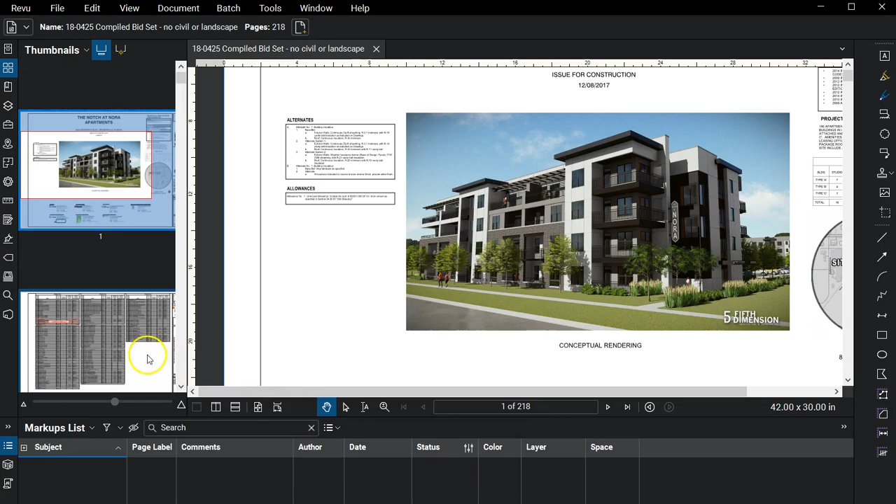It's, as you can see here, 218 sheets in this entire set. A lot of sheets. We can jump here real quick to a sheet index, and you can see all the various different types of sheets that are actually issued in here.

So one of the challenges of managing drawing sets digitally is that you want to make them easily navigable, or easy to navigate, so that you don't have to spend a lot of time finding the drawings digitally, where it's a little more challenging to do that in a digital sense like this if the drawings aren't labeled.

As we can see here, for instance, the drawings just come in labeled by number. So if I scroll through this set, drawing number 18, I don't know exactly what drawing that is, based on what number the sheet was given in the set, because it's likely just the number of the drawing that was slip-sheeted in there in that order.

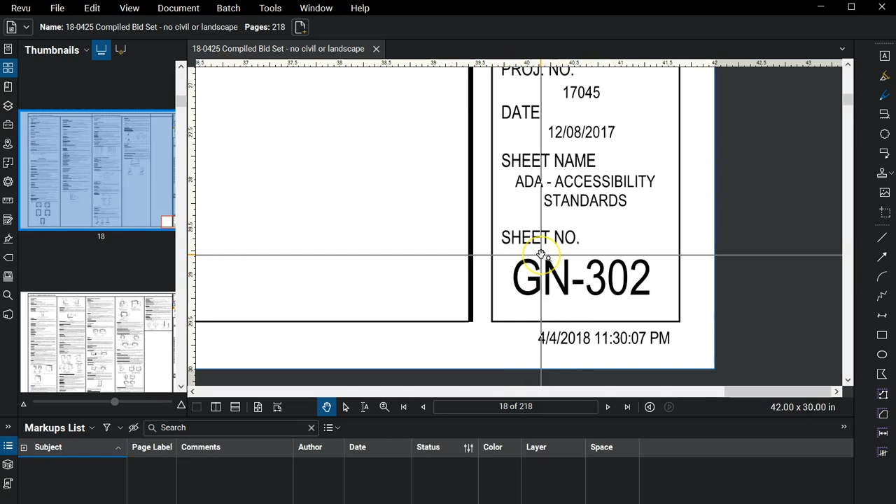We know that this drawing is GN-302. That's the sheet number, but how do we relate that to the sheet? Well, we could go in and just physically rename the sheet GN-302, but if I have to do that 218 times, that might get a little time consuming. So you might check if the architect can make sure that their sheets are labeled properly and accordingly. That can save you some time up front.

But some programs can do auto sheet labels where they can detect what that sheet name is. So for instance here, I can create page labels, and it really is a sense of knowing the program or the type of sheet that you're using, that if your drawings are searchable, as far as the text is searchable, it makes it a little easier to do this process.

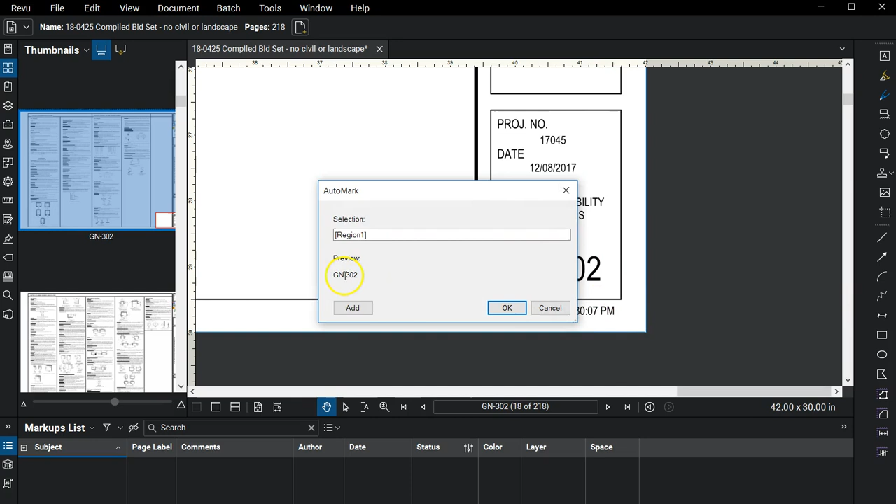So in this case, I can select a page region, and I can tell it to search the sheets in this region, and you can see it automatically picked up GN-302. We can hit OK, and I want to apply this to all pages, just to be sure. Hit OK. And it might take a few minutes to actually run through that for all 218 pages.

The other caveat to this is it's not uncommon for architects to have different title blocks, which is this area off over here, and how they label their sheets and exactly where on the sheet it's labeled. You saw me draw that square around GN-302, but the civil sheets might not be in that exact location. The electrical sheets might not be in that exact location. So this might work for all the architectural sheets, and then you're going to have to go and do this with the structural, the civil, and the others.

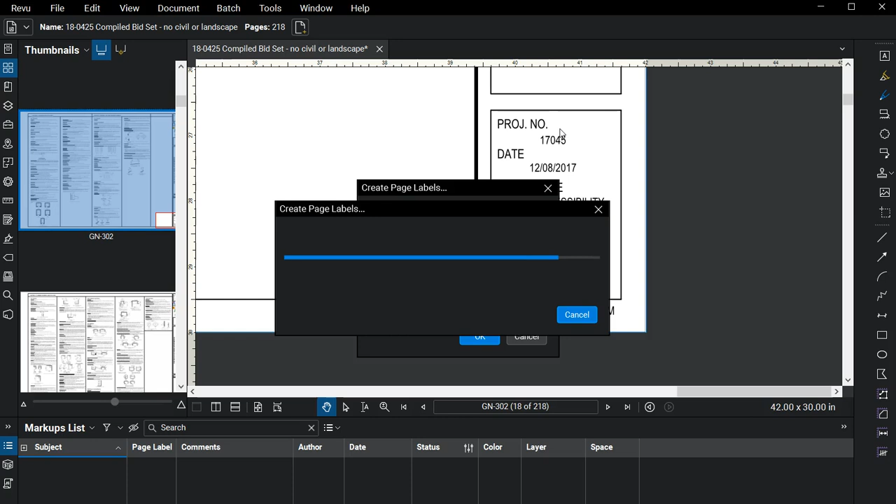If you, though, have an architect that requires all of their consultants to use their title block, the architect's title block, then typically all of the page labels will be labeled pretty much in the same spot. So there's GN-302. So we can look through here and see that indeed we actually have started to pick up the actual page labels themselves, A208.

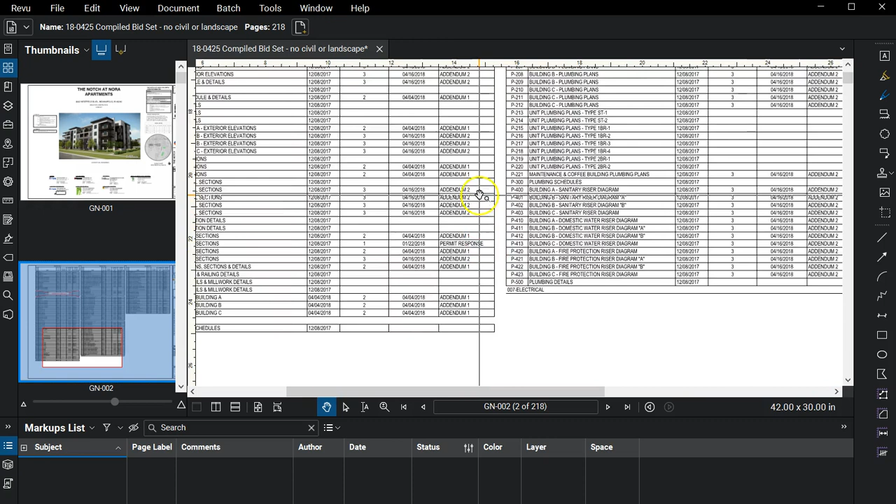This is actually going to come in handy down the road as we start hyperlinking these drawings to make it quite a bit faster than just jumping in the bookmarks or these thumbnails to try and find pages. But if we can go to, say, the sheet index here as the second page, if we can somehow create links where I can come in here and just click on that sheet and it will jump me to that sheet, that would save me a lot of time on navigating the drawings.

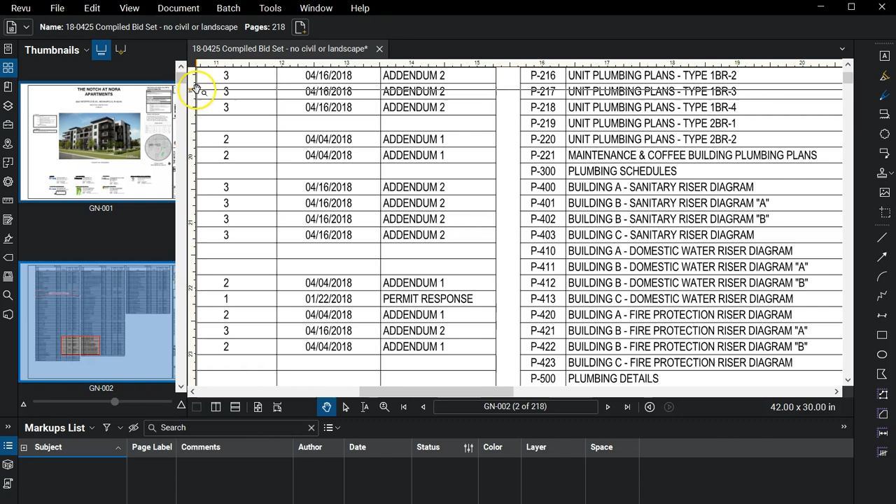And as you'll see in these examples, we're going to cut our time down by a lot. Just by labeling the pages themselves, that's going to cut drastically down on the time it takes to navigate the drawings. So one thing we can do to see how this worked, I can scroll through here and see at what point this might change to something that's not supposed to be, or I could come in here as well. This was the thumbnail view, but in 2018 we have the bookmarks, which I can create based on the page labels that I just created.

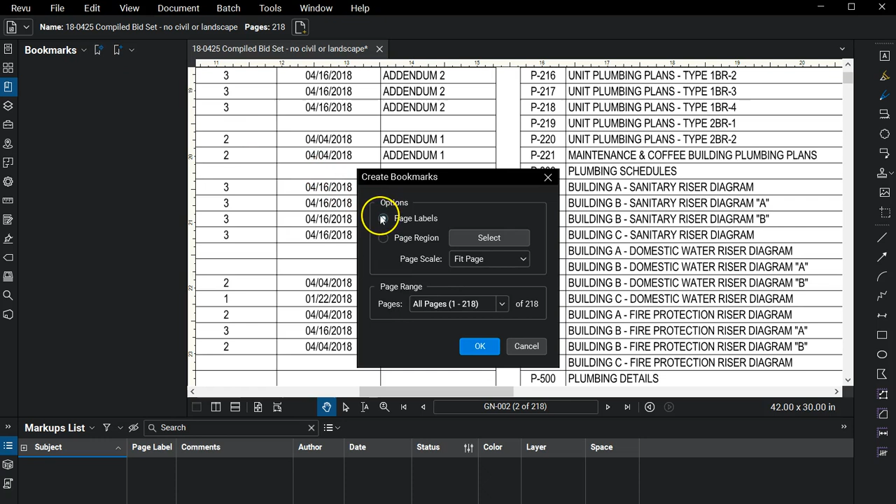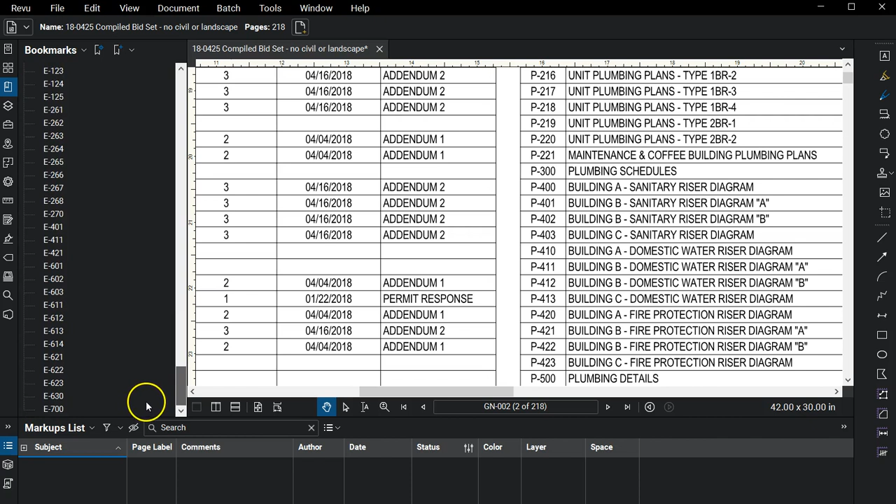So I can actually come in here and create bookmarks from page labels and apply that to all pages, and it should populate all of those sheet names here, as you see that I've done. And I can just scroll through and see where these sheet numbers might start to not follow the same protocol as others, where in this case it appears as though the architect had that title block as a requirement in the same exact location.

But if this started saying weird letters or symbols in here, it might indicate that on the electrical sheets, the title of the sheet might be oriented vertically or something like that. So you just have to be careful. And you can go in and do this as you saw me do for the architectural sheets and find out if it applies to all 218 pages, or maybe for half of those pages you have to go back and choose a new bookmark and only apply it to a certain number of pages that weren't labeled properly. But with our good luck here, we appear to have an architect that has taken the time to require their consultants to utilize their title block.

So every single sheet is labeled in the same exact area. And you can kind of see that by this example that I'm going to show you here, where if I leave this title here, if I click between the sheets, you see how it's relatively staying in that same block area. It shifts slightly depending upon the length of the numbers and the letter sequences you see here, but ultimately it's staying in the same place.

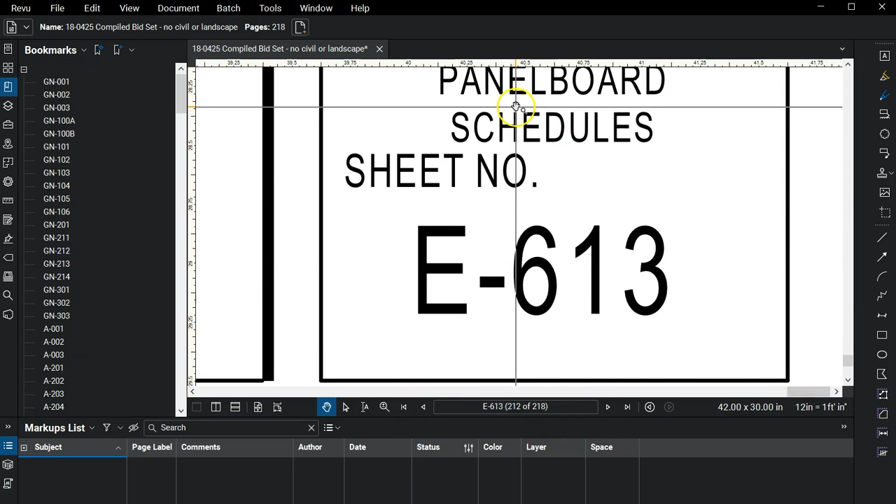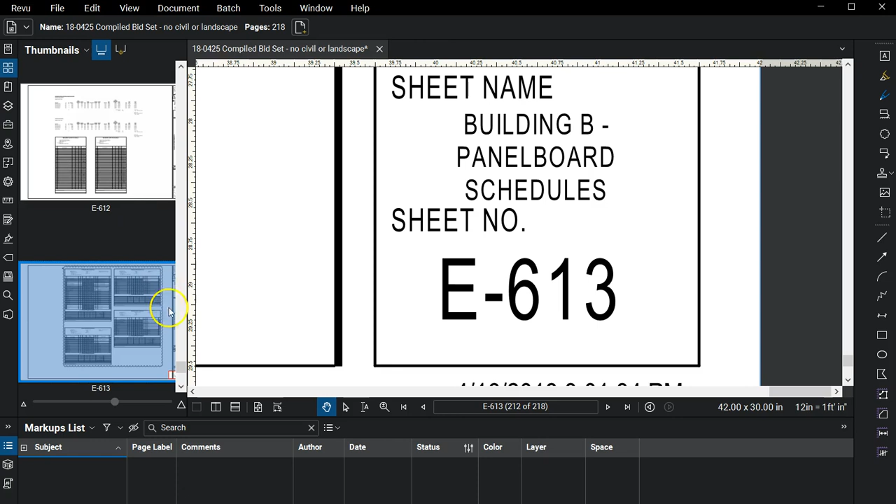You can actually even expand on the sheet number by including the label of the sheet. I used to do that and found it a little cumbersome, where some of the sheet labels got to the point where they were extremely long, so it was kind of difficult to make that accommodation in the page label. But as an example, I'll go back up to the architectural sheets here.

So for instance, this A201 sheet, I could go back to this create page labels, and I could do again page region select. I could tell it, okay, I want it to label this first, A201, and then I want to create an actual label for the sheet, so I'll do a space dash space and add another area where I want it to pull information off. And just under this sheet name here, I'll highlight this area below, so it'll look on every single sheet

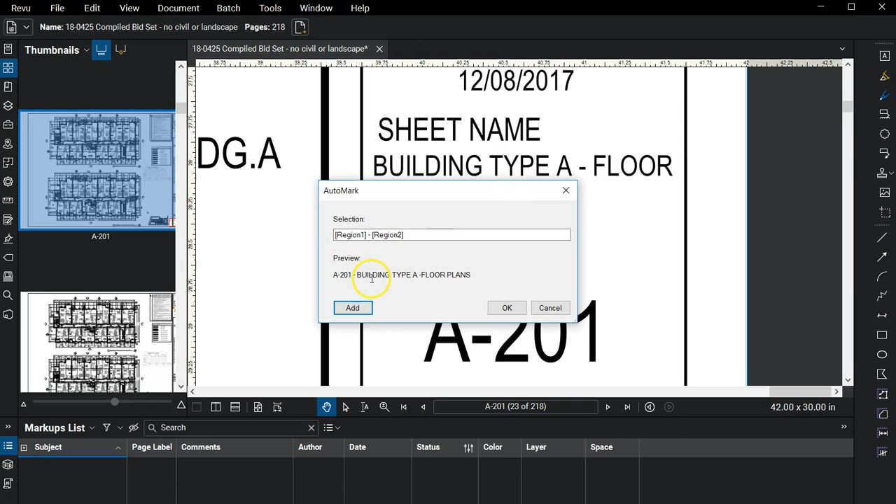for that information. You see here it pulled up building type A floor plans. Well, that's exactly what it says there, building type A floor plans. So it would label each of these sheets with some additional information that's provided here. If you'd like to do that, you're more than welcome to. For my own personal use, I find just the page label itself is useful because I go through the process of providing additional links in there where you don't necessarily need to know what the label beyond the page number is going to be for each sheet. But by all means, if you'd like to do that, you can do that quite easily.

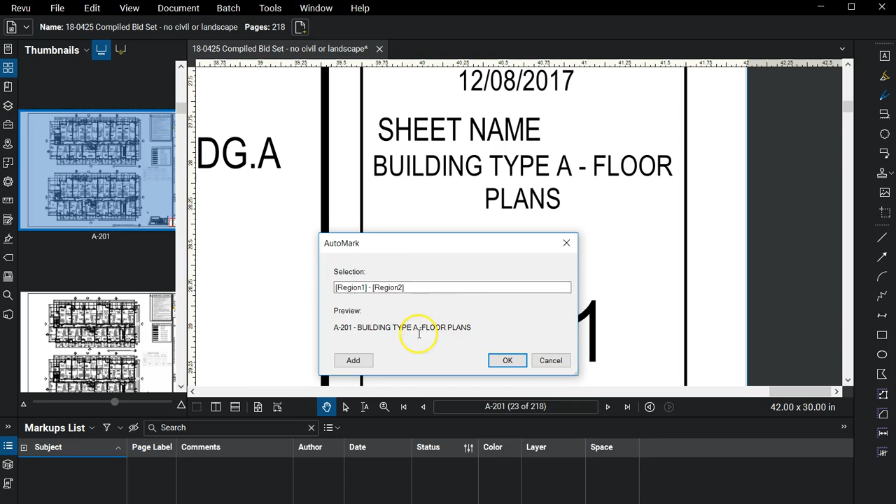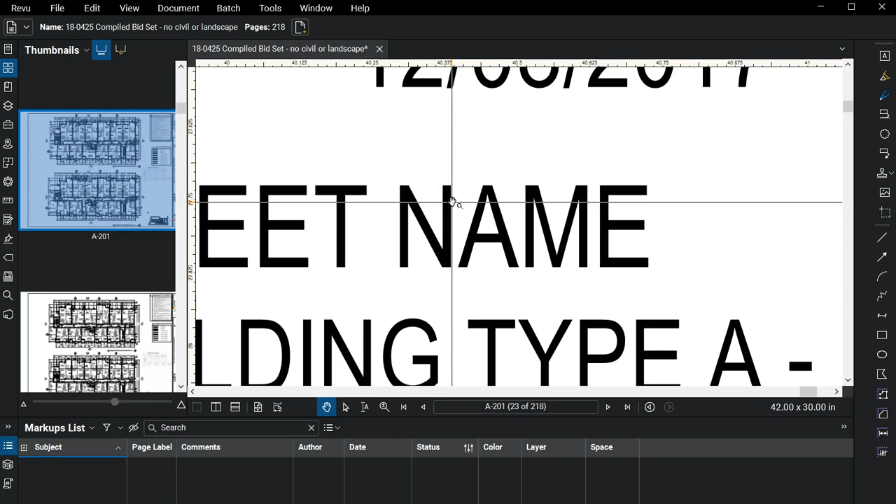You just have to be careful sometimes too, because the program, depending upon how the sheet was exported, might not be able to read some of these words up here. They might be in what we call raster format, where if I keep zooming in, it won't render. You'll see the letters are blocky, but you'll notice this particular sheet happens to be in a vector format, which means that as I zoom in on it, it continuously keeps rendering and makes the letters crisp again. So if you're zooming in on something and like a C, for instance, would look really blocky, that's a good indication that you can't use this feature to have the system automatically figure out what that label is going to be. But having said that, we've already got our pages labeled.

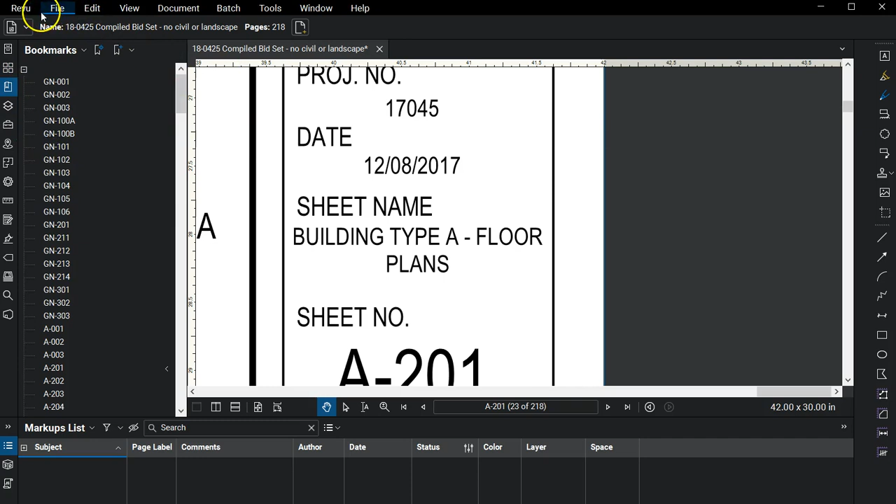It's good habit that once you modify it, you save that, so make sure that you're saving as you go, just so that you don't lose any of that work that you just did there. Even though it really wasn't all that difficult, you can see with a few clicks you were able to go in here and relabel all these pages.

So already what we have is a much easier navigable document, in that now at least I know what these page numbers are. So if I know I'm looking to go to sheet A204, well, there it is. I got the label right there. I can jump real quick to A204. I don't need to know that it was the 26th page in this entire 218 page document. Just being able to click on A204 and it take you to that sheet is a step above what we started with. Okay, but we're going to go way beyond that, and hopefully you can appreciate the direction that we're going to go here as well.

So one thing I actually, as a rule of thumb, do after I get my sheet labels completed, I go through and export each of these sheets as an individual file. One of the reasons I do that is it makes slip sheeting new issuances of sheets later a lot easier to do if I have them as individual files, but it also helps speed up the process of viewing drawings

if I don't have, for instance, a good connection back to a drive folder, or I'm working off of just a bad connection where it might take a while to update a sheet visually and render it in a set of drawings that's 218 sheets large. I mean, that's a fairly large file size. So breaking them up individually can reduce the RAM requirements for the program to actually read each sheet.

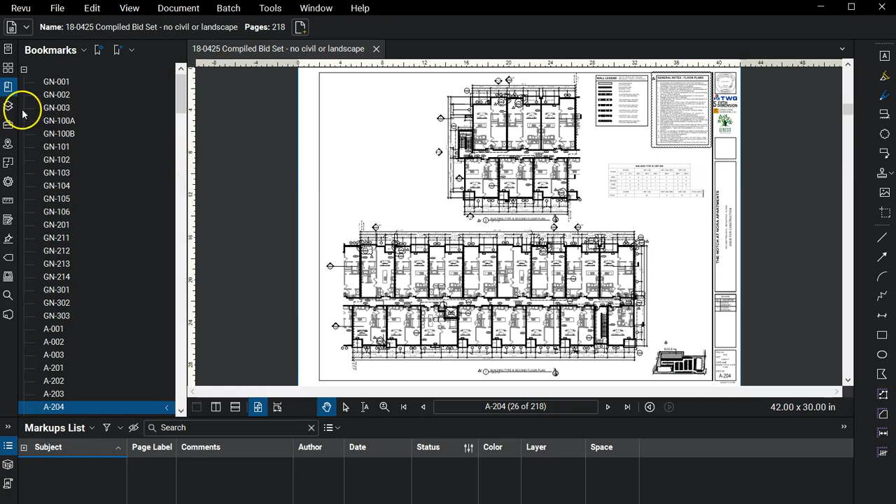So in order to do that, you have to go to the thumbnails view here, and if you just select a drawing and right click, you can see there's an extract pages feature where you can select all pages. What we're going to do is, for one, use the page labels to name the file, so each individual file will be named as the page label. These are options that you can check. For instance, you want to extract each page as a separate file, which we do.

If I don't have that checked, it's not going to allow me to check use page label or overwrite existing files. So if there was already an A203 in there, it would overwrite it. I don't want to open them after extraction because it'll open 218 individual files, and I don't want that just yet. Updating hyperlinks, that's if we have had any hyperlinks in there. I just keep that checked just in case there are. But I want to keep this set as a compiled set until I'm completely done linking it, so I don't want to delete the pages out of that file either.

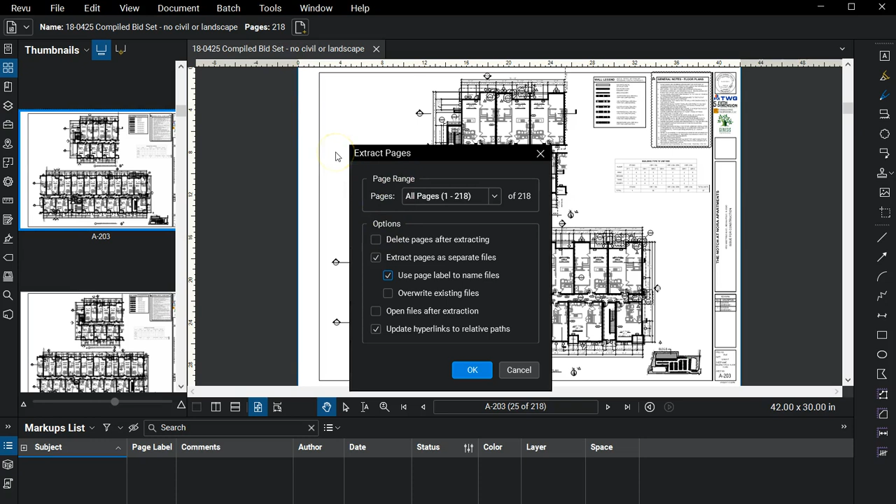Again, just having these options selected is all I'm going to do here, and hit OK, and then it's going to ask me where do you want to save this? So I'm going to just create a folder and call it extracted files. Select that folder, and then it's going to go through the process of exporting each one of those sheets as a separate file. I'm going to pause it here so you don't have to wait for this process. And when you come back, you'll see that each page is actually extracted.

So here, if we go to our extracted files now, you'll see we have 218 individual files, and they're all labeled with that sheet label as we created from Bluebeam. You'll also notice this is a quick way to see what sheet sets you might be missing. In this case, the civil sheets were issued separately, because one thing I don't see in here is a civil set of sheets. So I see A, architectural, E, electrical, GN is just general. It has the wall types, things like that, and your sheet index, the cover. M for mechanical, P for plumbing, S for structural, and that's it.

So I don't have any fire protection drawings, landscape drawings, civil drawings, or any other specialty type consultant drawings in the set. So that might be a first indication that you need to engage somebody for some additional drawings, because frankly there has not been a single project I've ever been associated with that didn't have a set of civil drawings. So just simply sending an email and asking the question, even if the answer is no, well, you've asked the question and verified.

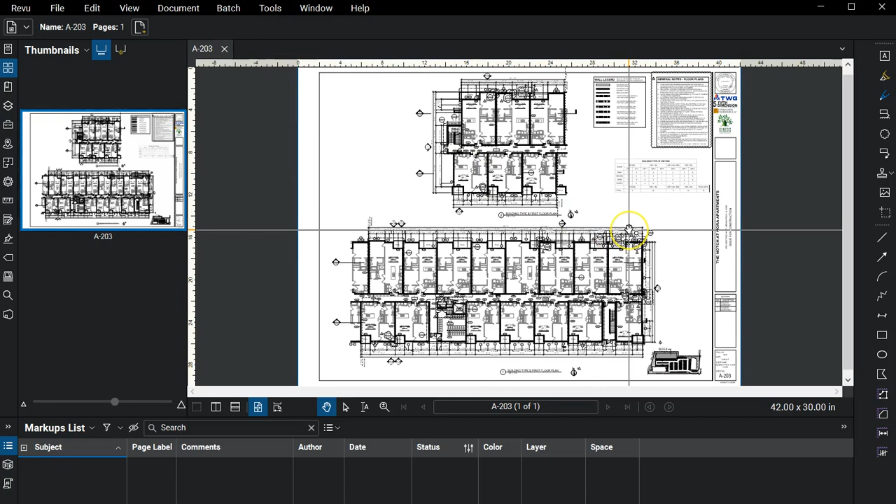But I'm going to go ahead and get rid of this particular set. I don't want that cumbersome set in here. But again, I just want you to see that indeed our sheet sets are now just as single sheets. But even in a single sheet set like this, there's a lot of cumbersome issues we have in here as far as, well, how do I get to A401 if I want to see detail 5 or any of these other details on here, or even being able to jump to different window types.

Without the sheet in a larger conformed set, it might be difficult to do that without having hyperlinks on there. And a hyperlink is just something where I can click on this and it'll take me to at least sheet A-221, which Bluebeam in the 2018 Extreme version actually allows you to do, in a sense, automatically with a few clicks. You can go through the process of doing an initial link where if I click on A-221, it'll take me to that sheet immediately. It won't zoom in on any details, like it won't take me to detail 7 on sheet A221.

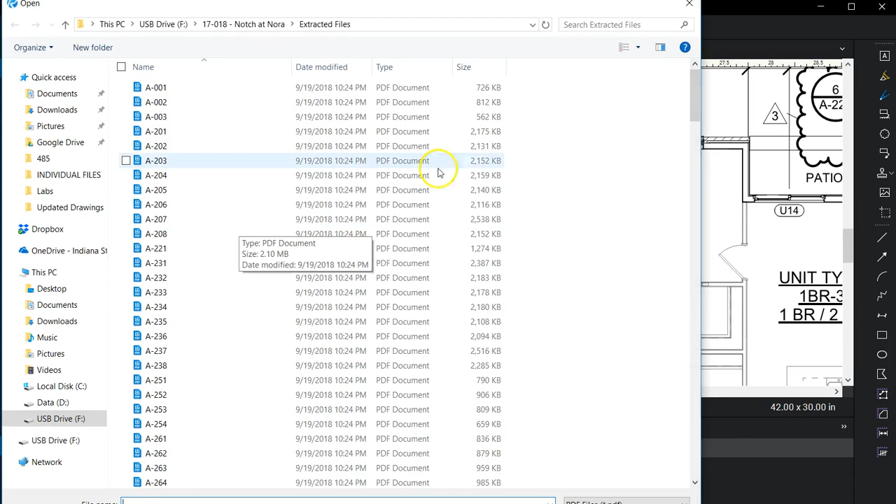But the process, if I didn't have that detail, would be to go to File, Open, and go to that same detail, A221. So I'd go to A221. Here it is, and I had to go zoom in and find detail 7. So there's detail 7. Here I'm at A203. That detail 7, I would have to go actually find that page and zoom in on that detail. But thinking of it from an efficiency perspective, I want to save everybody else working on this project time to not have to go through that process of bringing up each file individually. It's cumbersome. It's annoying, frankly, to have to do that.

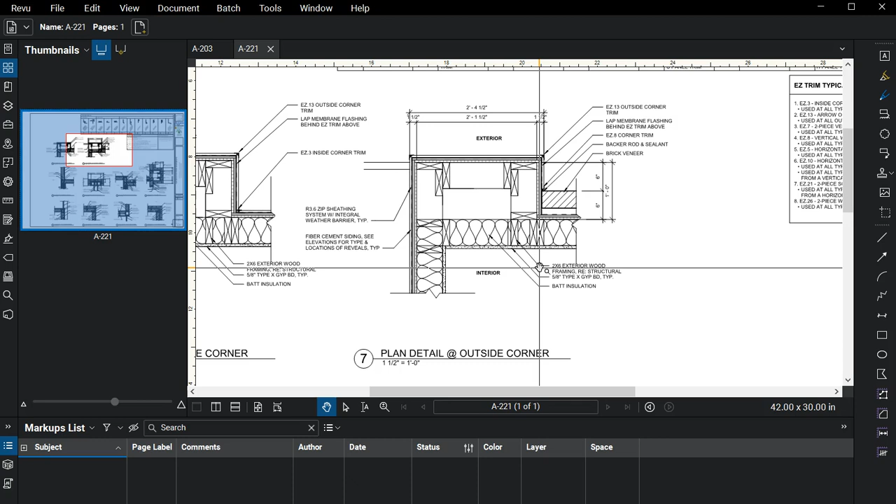But when you think about it, that's kind of what you have to do when you have a hard copy paper plan. You're physically looking at a sheet of paper and you have a half-size set or a full-size set with all the drawings in there. You look at this detail, then you have to go flip the drawing to sheet A221. So in a way, it's similar to, if this wasn't linked, going out and finding sheet A221, just as I did, it took a few seconds. It wasn't a drastically long period of time, but multiply those few seconds. If it took me 10 seconds to find that detail, how often do I do that every day? And on top of that, how often does everybody else on my project team have to do that all day long, every day through the duration of the project?

So again, thinking of it from an efficiency standpoint, what if I could make it easier and faster for somebody to navigate? It saves everybody time on the job site, and then that's multiplied if the company that you're working for shares this exact linked file with the subcontractors, which is not uncommon these days, that subcontractors are given access to this linked file, and they also are more efficiently able to navigate these drawings.

Okay, and keep in mind too, we're just talking about the initial navigation of the drawings, not even talking about yet adding anything like RFIs or even submittals on there, or even doing some markups for keeping as-builts up to date. Say the superintendent on the site might have a set specifically for as-builts, and that superintendent can mark up anything on those drawings, and that's going to be kind of the record set. So if a pipe didn't get installed exactly where it was located because there was some obstruction in the way, they can make notations directly on the set and say pipe moved 10 feet to the south, and actually draw on a line representing the new location of the pipe. But enough on that.

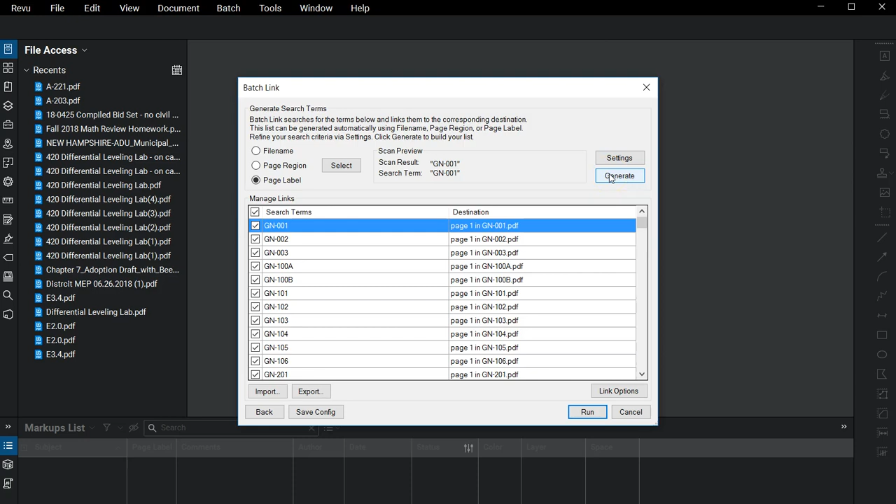But once you have these settings the way you want them, then you hit this generate button, and it's going through the entire set of drawings, finding every instance of this, every instance that there is possible out there.

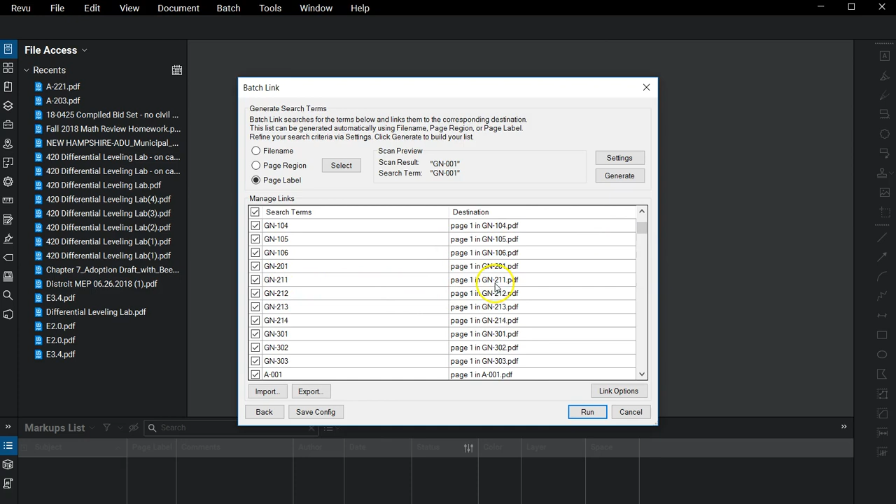So here you see the search term, and you see the destination is the actual file name. So it's going to look on every single individual sheet, and when it finds GN211, it's going to hyperlink to sheet GN211. So I can hit run, and this is going to take a little bit of time for it to run through all these drawings.

So I'll pause the video, and when we come back, I'll show you what the outcomes of this process are. And you'll see how much easier right away it is to actually navigate these drawings with relatively little effort that we've done to the drawings themselves.

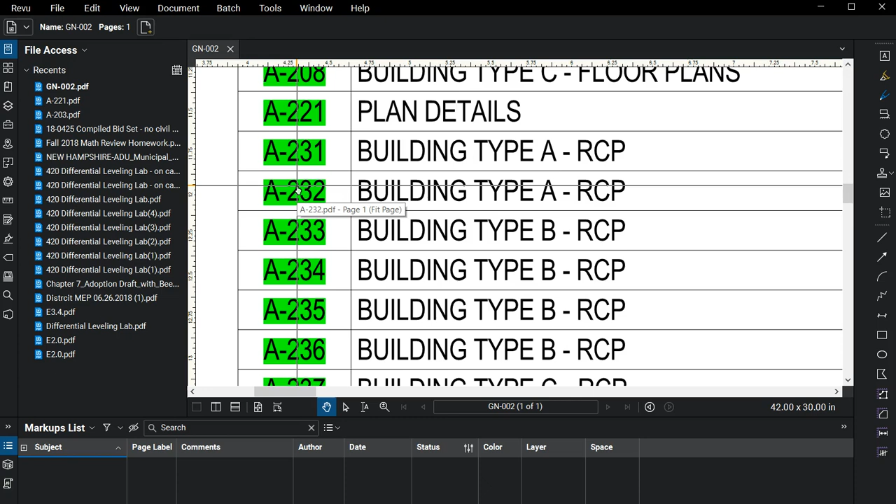What you'll notice is there's lots of green highlighted sheet labels in here, and you'll notice the cursor looks like just a flat hand laid out, but watch what happens when I hover over each one of these links. It turns into a finger, which is a link. So I can click on A232 and it brings up sheet A232, and magically within sheet 232 there's also links to other sheets in there.

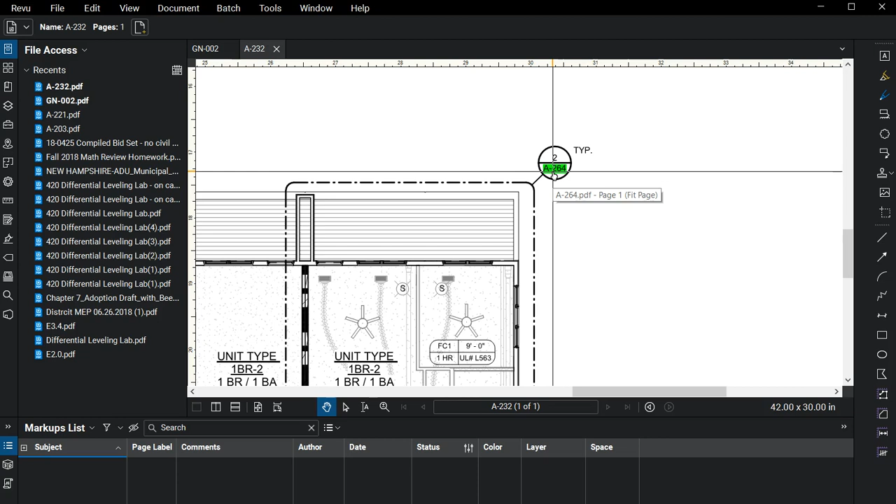So now you can see, just by the few processes that we've gone through in here of just labeling the sheets, generating each sheet as an individual file, and then generating links on those sheets, we've made this process of navigating these drawings that much faster. So you see what happens is it basically jumps you to that sheet. It opens the full page of the sheet.

So in a way, you still have to remember, when I go to detail 5 on A752, I still need to remember to zoom into detail 5. That's the actual detail that I'm needing to see on this sheet. So when I get to the sheet, I need to go and zoom into detail 5. So there is still an extra step involved.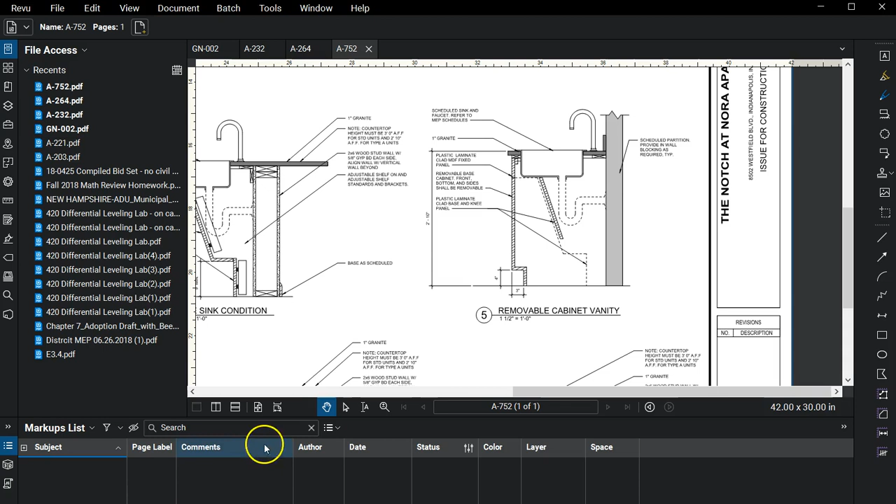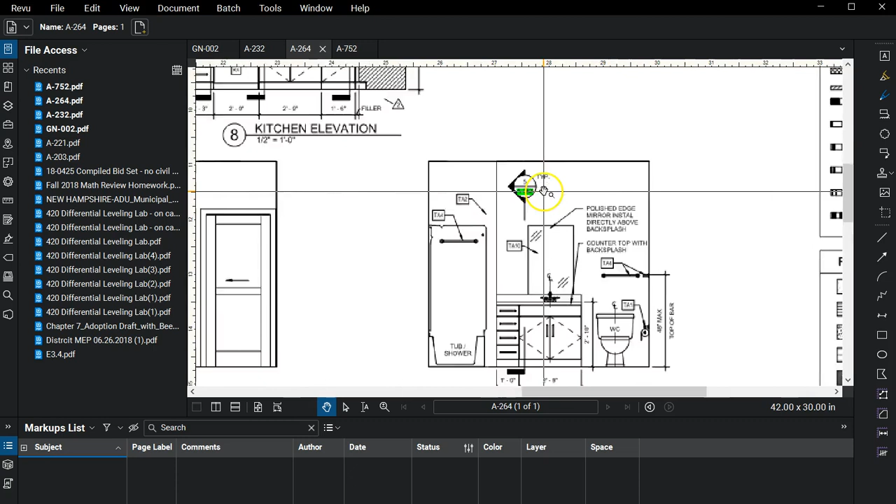And a lot of softwares like Procore and PlanGrid do the automatic links just like you saw, and they'll jump you to the overall sheet. But one thing, if you want to take the time, which is actually very useful, and you'll see why here in a minute, is to actually create these links such that when you click on them, it jumps you straight to detail 5.

Instead of the zoomed out page, when you're on A264, if you jump on that detail, you'll be looking at detail 5. You don't have to think to go zoom in on detail 5. It will automatically take you there. That's not an automatic process to do that. It is a few extra steps to do.

But I'll do an example of that with this very sheet. Or not this very sheet, I might pick another one, one with a lot of details on it, to show you the value of, if you have a sheet with 30 details on it or whatever, that you don't have to take the time to go find that detail on that sheet if you have already told it to jump specifically to that detail.

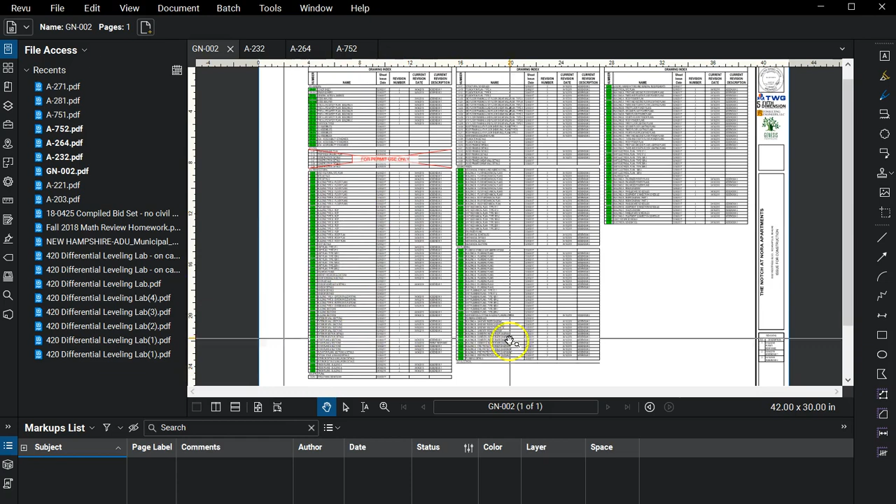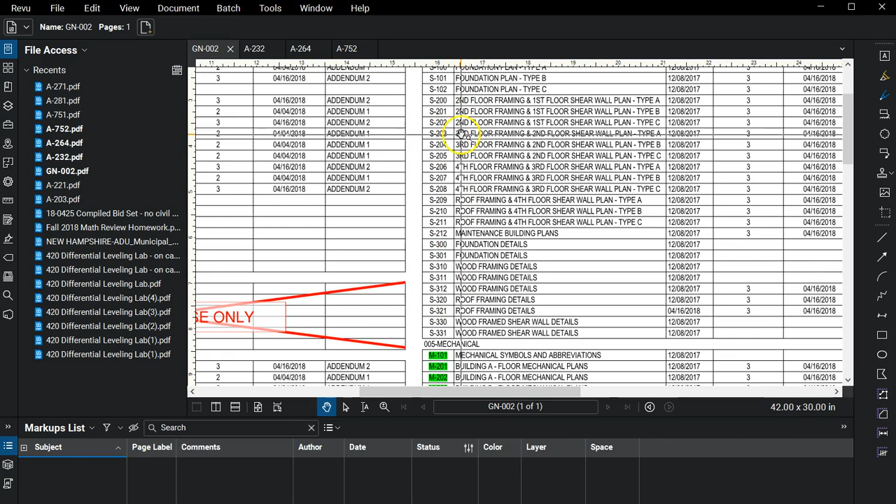Our structural sheets did not link as expected. Look at how this is labeled: S-202. But if we go back to our file name and scroll down, that's not how they're actually labeled. It's labeled just S202, so it's not that the program made a mistake. There's a mistake in the consistency of how the architect labeled the structural sheets in the architect's index versus how the structural engineer labeled the sheet. So you see S202, there's no dash in there.

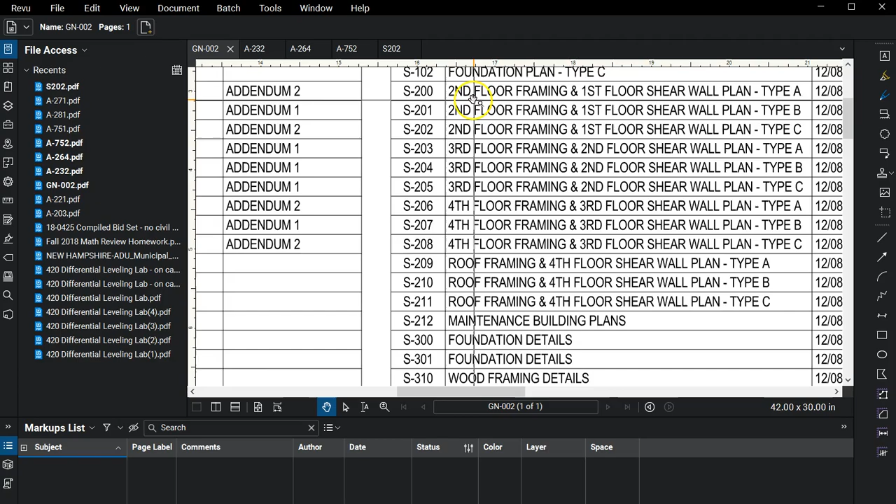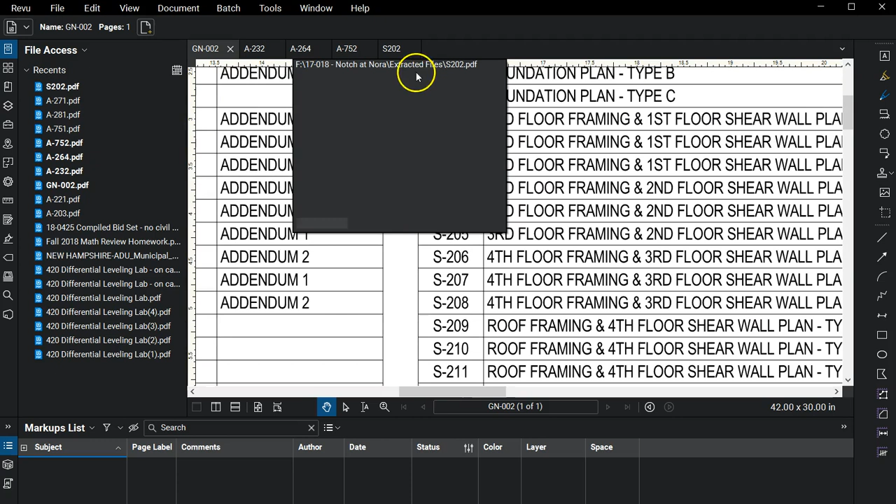But if I go back here, S-202 is the label. So there is a way for us to manually create links, and I can show you that as an example for this S-202. I can actually come in here and create a hyperlink without having to go through the batch link process.

If I come over and hover over this little location symbol, it's called links. All those hyperlinks I created are actually all individually listed here, which we'll use in a little bit. But if I grab this little hyperlink tool, or just hold Shift plus H, it shows you what the shortcut key is.

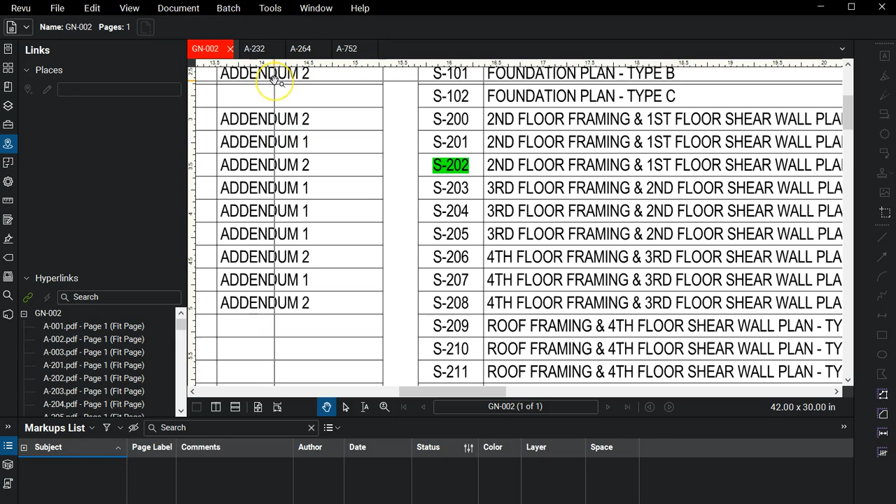If I just click this, I have the sheet open, S202. I can highlight it after clicking that link, then come in here to jump to S202. Hit OK, and there it created a link. If I exit out of that, so it's not directly up there -- and before I move on, again, save. Very good habit to get in. You can see that link looks now just like the other links, no real difference there, and no real difference in how it works. So now sheet S202 is right at my fingertips.

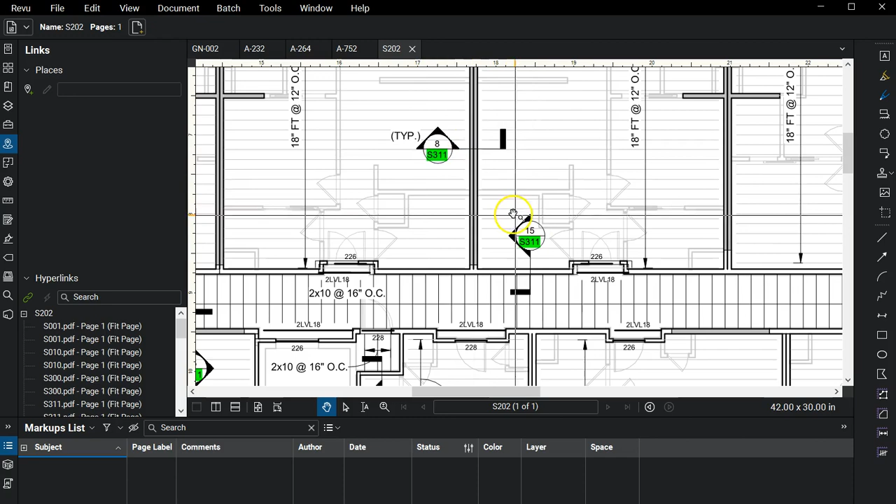We are fortunate though that within these structural sheets, the engineer did maintain their labeling system correctly, so the links still worked within the structural sheet. I can jump to sheet S311, I just have to remember to jump to detail 15. This is a perfect example of why it might be important to provide a link that zooms in directly on detail 15, because it took me 10-15 seconds just to find the detail, let alone if I'm busy or not focused.

So now I got to jump back to S202 -- oh yeah, it was detail 15 -- and then jump back to S311, okay, find detail 15. It happens. Distractions are abound as we're walking around on a project.

So again, as a perfect example of why we'd want to make it such that it would automatically jump here, is because we want to remove that burden from everybody in the project team. Have one person set it up, take the time to do it initially, and then you'll see here in a second how much faster it is to navigate the drawings.

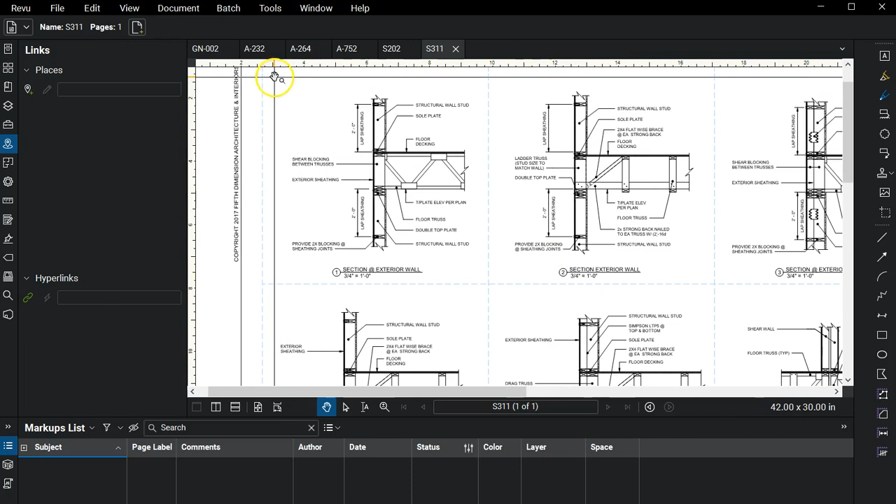The way we do that is we create spaces, which are areas we'll designate in the drawings that represent different details. In this case, this will be detail 1, detail 2. This structural engineer has provided a light blue outline that maintains that entire detail within this box, which is important because the box we're going to draw will represent detail 1, and we can link all the other references to detail 1 to jump specifically to that area. That's done with the spaces icon here off to the left, which looks like a little plan view.

What we want to do is add a space, and when we do that, we just highlight around it just like that, and I'll type in 1, just call it 1 because that's detail 1. Then I'll come in here, highlight over detail 2, and it automatically thinks I want to go in sequence to number 2, and I do.

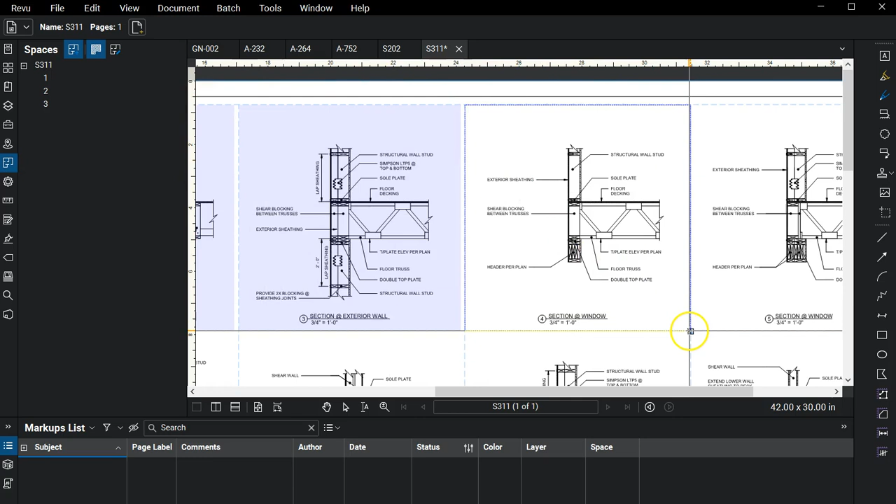So what's nice about this is if it's labeled properly, this is actually a fairly quick exercise to go through, and you want to also make sure that you're not overlapping spaces. So there is a little bit of a gap there, and I'm not going all the way across, because if I start overlapping spaces, it can have multiple labels, which is useful in some cases, like in punch lists where we want to label multiple areas, but not as useful in others, as you'll see.

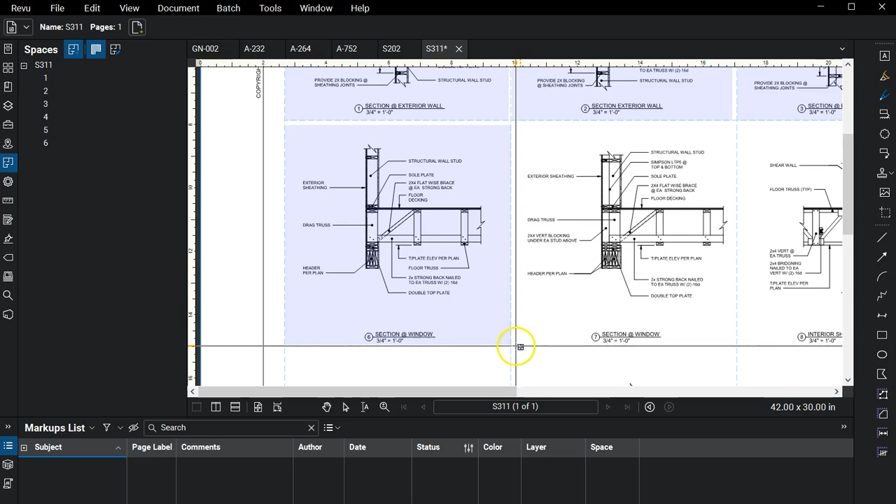So we'll just keep going. You don't want to get complacent in this process because sometimes the engineer might skip a number, leave it blank, and that's a little bit more of a manual process. But as of right now, it appears that we're going through at a nice pace. Everything is aligning up until this point. This is a perfect example.

So this blank space here would be number 11. The program doesn't know any different, so we will have to tell the program that it wants to label it as 11. Unfortunately, we don't have an 11, so we could go ahead and label this blank space 11, assuming that's where detail 11 would go if it's issued in a later revision or addendum. But I also don't like doing that because, believe it or not, it's not always common sense for an issuance to come out. They might throw a new random detail in there and call it detail 28 or whatever it is. So I don't recommend labeling spaces that aren't actually labeled.

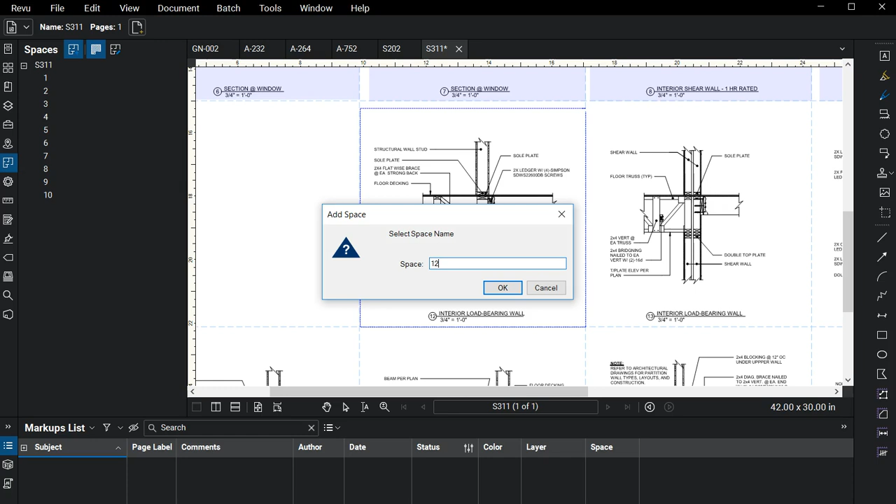So I'll actually have to manually come in here and change that to a 12. But no worries, as we go on to 13 here, it's continuing to number sequentially.

So I'm going to pause this because I'm sure you don't want to sit there and watch me do all this. When you come back, you'll see all these spaces will be labeled.

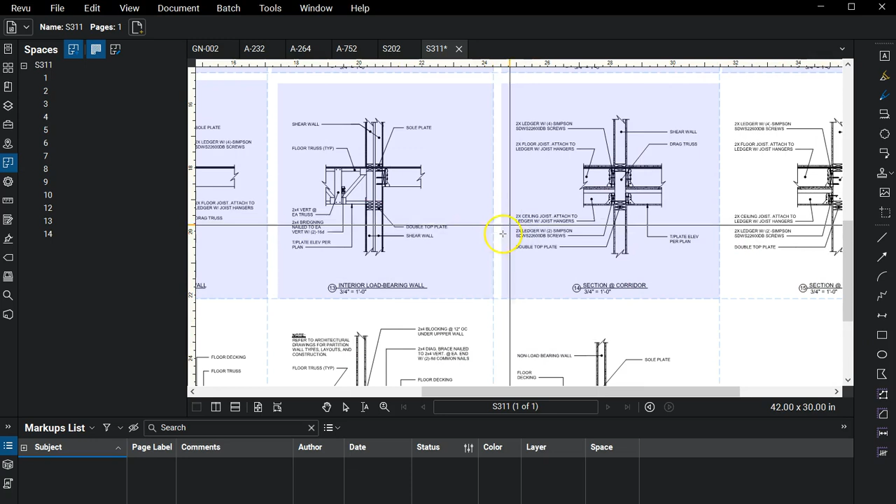So as promised, here we are zoomed out. You can see it's kind of slightly highlighted in a light gray, light blue color. Don't forget to save, as always.

It is a manual process, I'm not going to lie, as far as coming in here and doing this. I'm not sure if they figured it out. They may in a future issuance of this software, but this is a fully manual process to get it to actually zoom in on a specific detail.

So you do need to have an intimate understanding of the drawings to do this. You again are taking on the responsibility of what somebody in the field will be seeing when they click on a detail. So if you make a mistake, if somebody's not paying attention, it could be detrimental.

But taking the time to do this, again, pays dividends in the amount of time it saves everybody. So do take your time, double check yourself, make sure things are linking properly, and also take notes of things that are not linking. So if you have a detail on your plans but no detail sheet is provided, or no sheet is provided, or no detail on that sheet.

So for instance, if we go through here and find a link to sheet S311 and detail 11, which we know there's not a detail 11, well, we would make a note of that and write an RFI to the engineer saying this detail is referencing us to detail 11 on sheet S311. However, there is no existing detail 11 on S311. Please provide detail. And then a new sheet would be issued, or an RFI sketch would be issued to provide that, and then you can add that into your drawings.

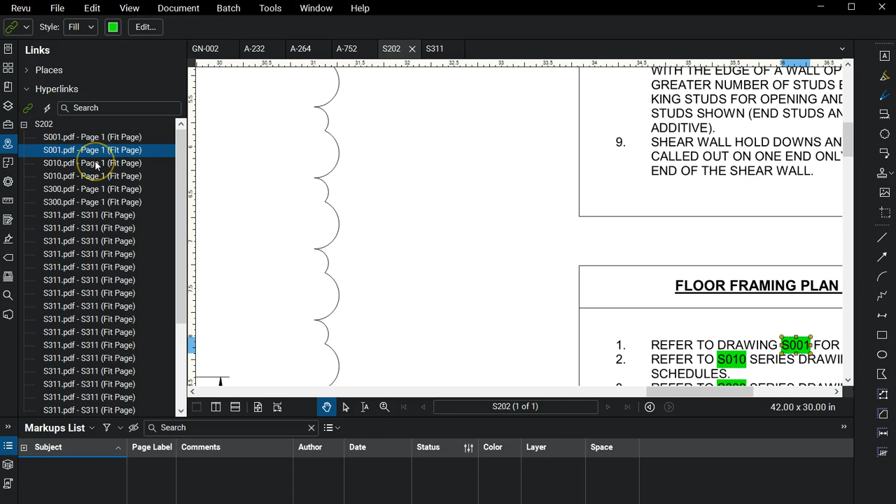They'll just jump to the whole sheet, telling you to refer to S010 series for specific schedules. If it specifies a schedule, like referring to S010 for a foundation schedule, and there's a foundation schedule on S010, you can put a space around the foundation schedule and have it linked directly to that. You don't have to have a specific detail called out for it to do that.

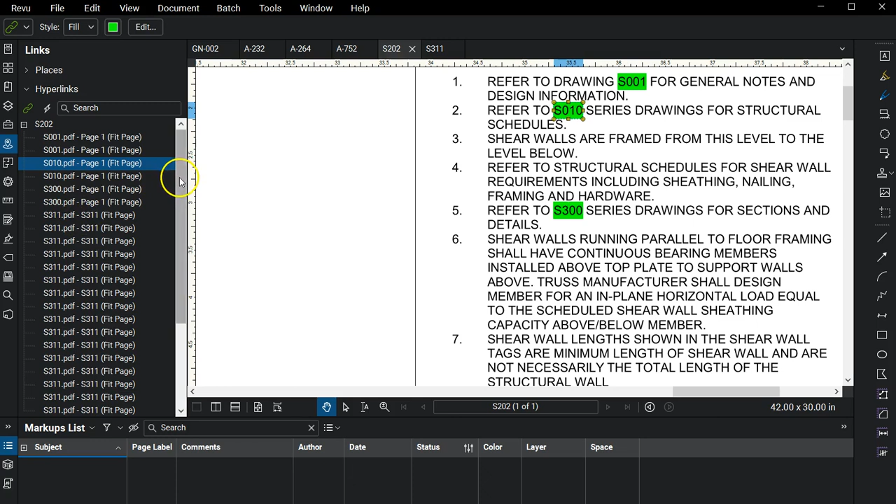But what we're going to focus on here is all these S311s. You see from here, S311, all the way through. For all of these, I can go in and do something more than just jumping to the whole page view of S311. I can right-click, hit Edit Action, and look what I can do here.

Keep in mind, I'm the one that needs to take responsibility for this, since this needs to go to detail 4. So when I come to the spaces drop down, I find detail 4, hit enter, and that's going to jump to detail 4. And there it is, 4-S311. This is also a way for you to do a quick check once you're done to make sure things are actually linking where they need to link.

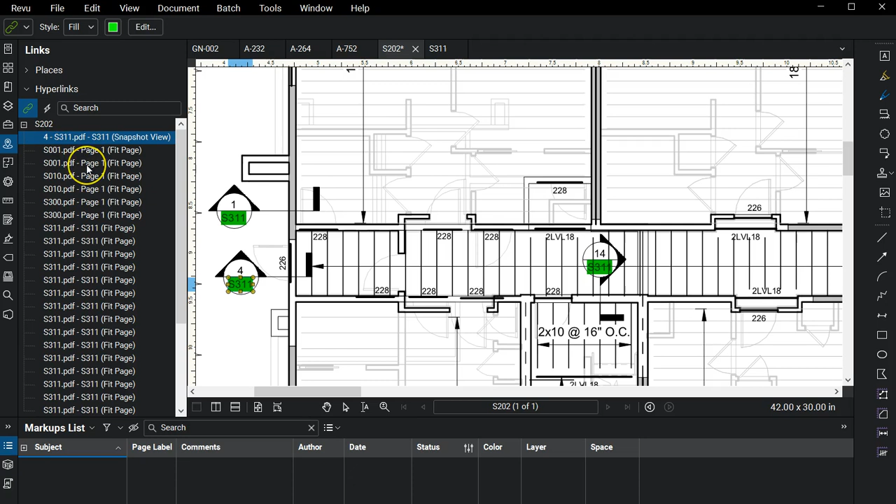Again, this is a very manual process. This one I need to change to detail 12. This one here goes to detail 1, you can see it highlighted right there. Edit action, detail 1. Edit action, detail 17. Edit action, detail 2.

What's nice about this as well is if you have multiples of this, you can actually go through and delete the old hyperlink. If these were all detail 2, I can delete all of these page references to S311, change this one to jump to detail 2, and copy it to all the other locations so I don't have to keep doing this process. There might be only a few instances where you can do that, but if there are several details that are the same exact detail reference, it might save you some time.

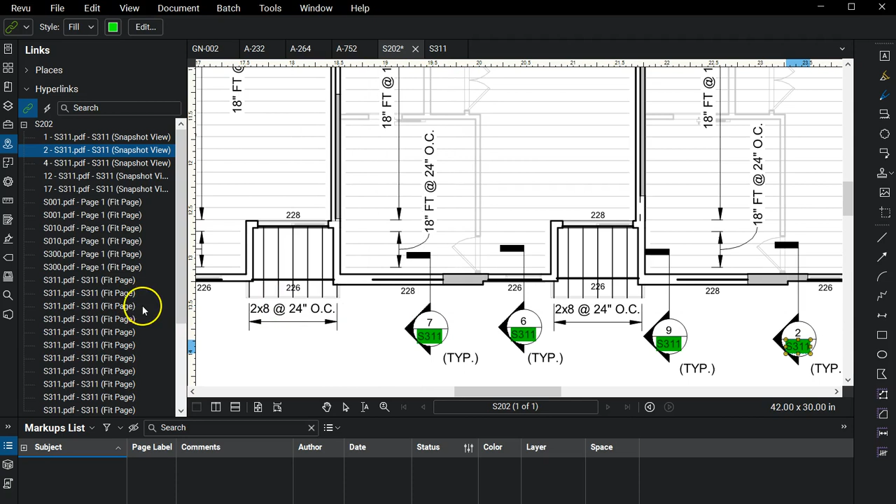But I think you get the idea of what I'm doing here as I go down. I'm going to pause it, and when you come back, you'll see I'll have completed all the S311 links.

So I have completed all those S311 links. I can verify that by the fact that all the S311s, as you see here, have individual details associated with them. You also notice that not every detail is used. In here, I don't see detail 3 used on this particular page. It doesn't mean it doesn't exist somewhere in the set, but this also might be a way for you to identify if there's sections provided that aren't actually referenced anywhere in the drawings.

You could go drawing by drawing and check for detail if any detail 3 is provided, and if not, that could be used as an RFI saying, why is detail 3 provided if it's not referenced anywhere on the drawings? Please provide a reference on the plans for where detail number 3 on S311 occurs. This is a way to back check the drawings and make sure all the information you need is provided. It's a process that happens time and time again from the pre-construction side all the way through construction. Everybody needs to take time and understand their drawings, and one of the first things you should do, whether using paper prints or digital drawings, is go through and make sure you have all the drawings you need, all the details you need.

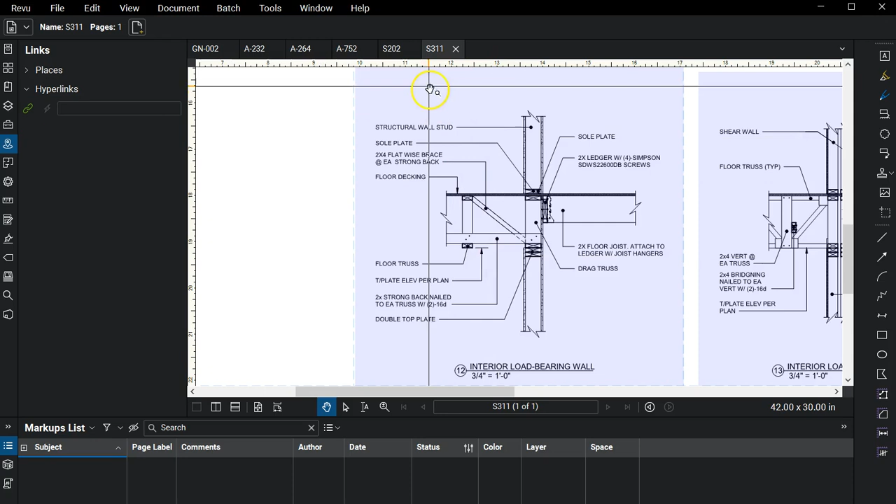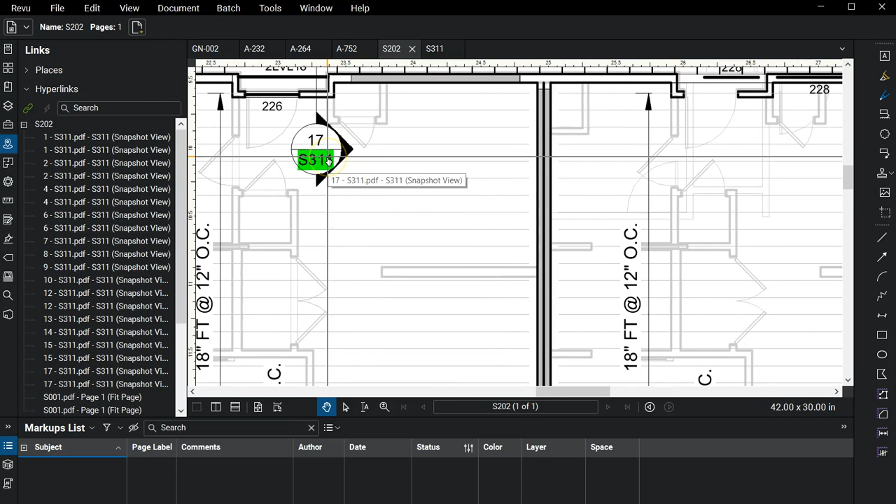Again, it's a tedious process, a little, not too terribly bad, but just imagine the value, and I hope those of you who are working in the industry professionally right now can understand the value of what was just created by a little extra work, that I don't have to zoom in on detail 17 when I get to S311. It's going to do it for me.

And this could be details within details within details, and this works the same way. Kind of like detail inception, if you will. So if there was another detail in here and I had taken the time to hyperlink specifically to that, it saves time looking at detail 17, but then time looking at the next detail, and so on and so on. So it perpetuates an efficiency through the project that anybody who is part of that project can benefit from.

And in the industry today, turnover is sometimes prevalent, because in this current market there's lots of work going on, so it's not uncommon for people to drop what they're doing to go to another company for better pay or better benefits, whatever it is. And so this company's left with trying to find a replacement project engineer or project manager or superintendent.

And having something like this already set up where somebody brand new to the job can come in and navigate the plans without any problems would speak volumes to how quickly that project can get back on track. A superintendent, project manager, or project engineer doesn't have to take the time to really learn the drawings intimately. It's kind of done for them, and they don't have to worry about it.

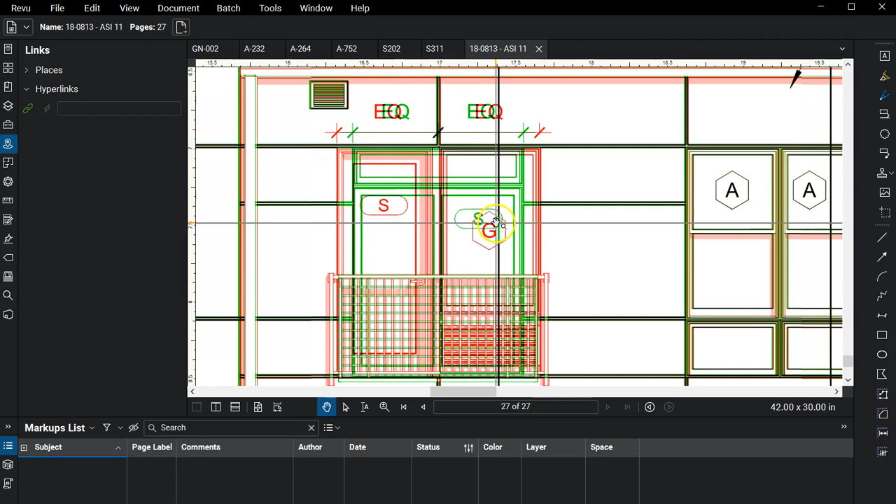But wherever there's a change, you can see here there was a slight shift, for instance, in the location of this patio door or window. And it even looks like it may have added some information, so anything red is added, anything green is deleted. So this might be that they switch sides, so this S type window is going to be on the left now versus when it was on the right. You have this glass type G, or whatever information is there.

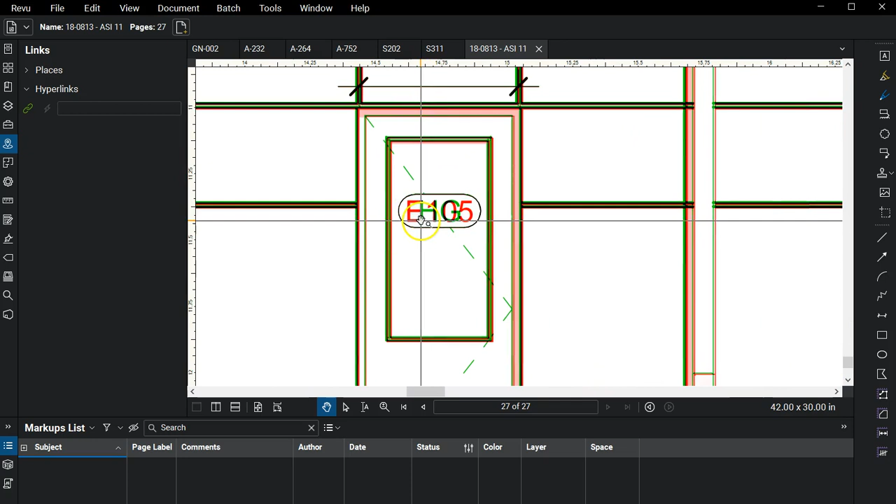You can see it's not necessarily highlighted or clouded to warn you that there was a change. This doesn't need that. This program can overlay drawings and show you where things changed, even changing numbers here. So this was previously noted as just HG. Now it's noted as E105. It might not be a significant change, or it might be, but this program allows you to capture that.

Just like here, it added some shading from the awning in the new drawing, which is why it's red, where it wasn't there in the old drawing. So again, the program is useful beyond just creating links to help you navigate, but certainly that is one of its main benefits.

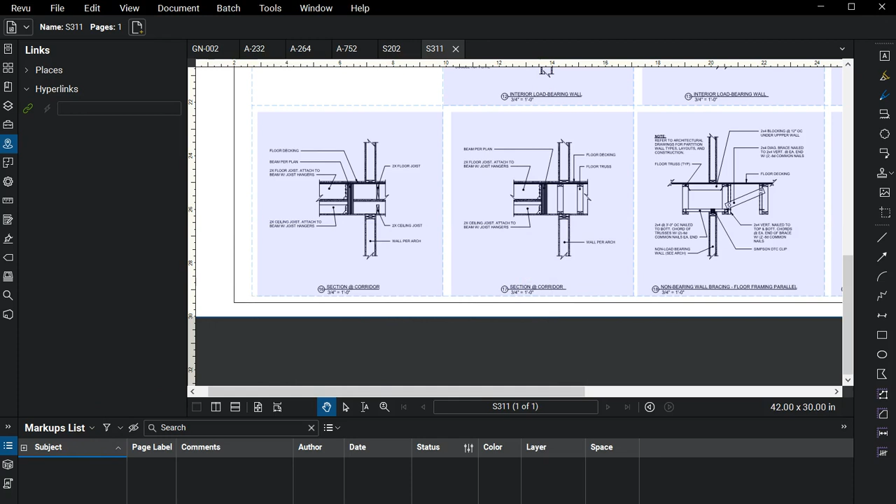But if there was a change to these drawings, I can show you how to make a markup on this drawing, and then if you have a certain RFI number, you can actually link that RFI that's associated with it so that it would bring up that actual RFI response. So for instance, I can come back here to the main drawings and go to, say, some exterior elevations.

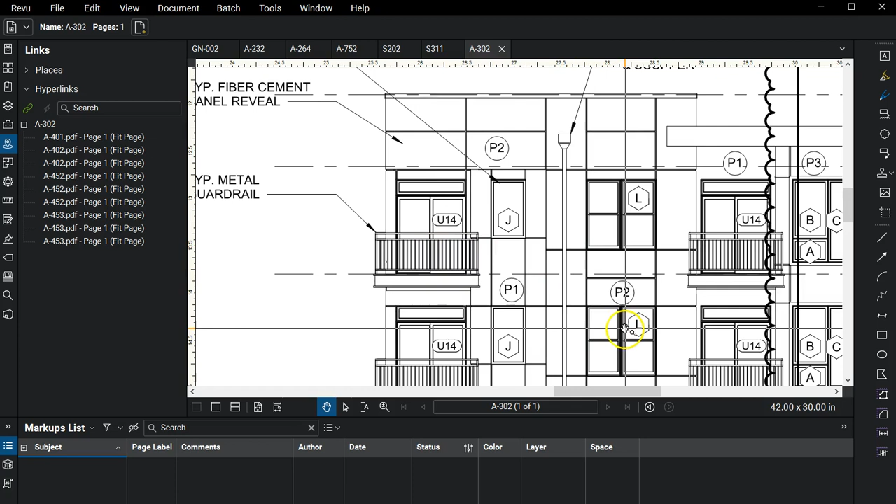And there might be a change, say, to this particular sliding glass door. I can create some markups on the drawing itself and even label those markups so that I know, and I can convey to others that there is a change in this particular drawing. You don't always get issued brand new plan sets when a change is made. You might be issued ASI sketches, addendum sketches, or RFIs that address the issues.

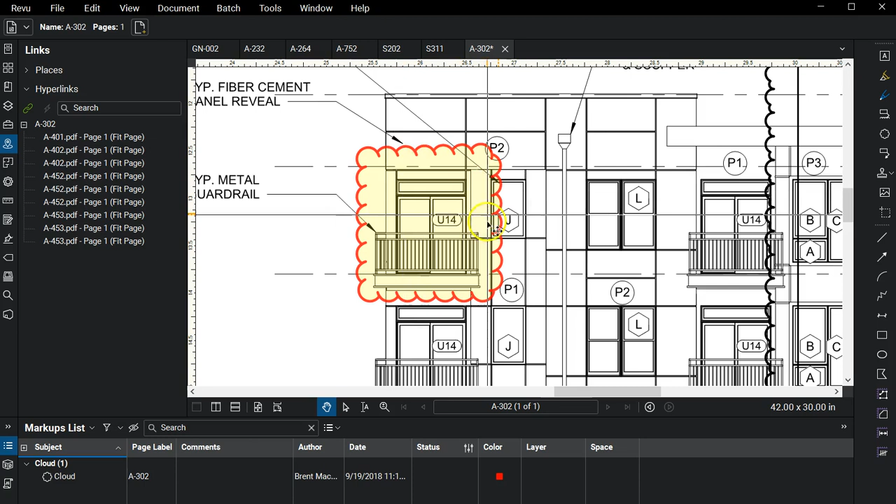So as a best practice, you want to highlight the area to draw attention to it. One of the nice things about this program is you can save some of these, at least the formatting of some of these, so that it's usable every time. You can make a special cloud for submittals, a special cloud for RFIs. I personally like this with a slight hue behind it so that it stands out, it's very visible.

The cloud itself doesn't give any information, but what gives the information is a call out. So it's a, sorry, grabbed the wrong one there. There we go, call out, where I can actually put in the RFI information in here. So let's say this particular sliding glass door was affected by RFI 108. I can put RFI 108 right there on the drawing, and I can actually create a condition where this call out will link by an edit action to the actual RFI.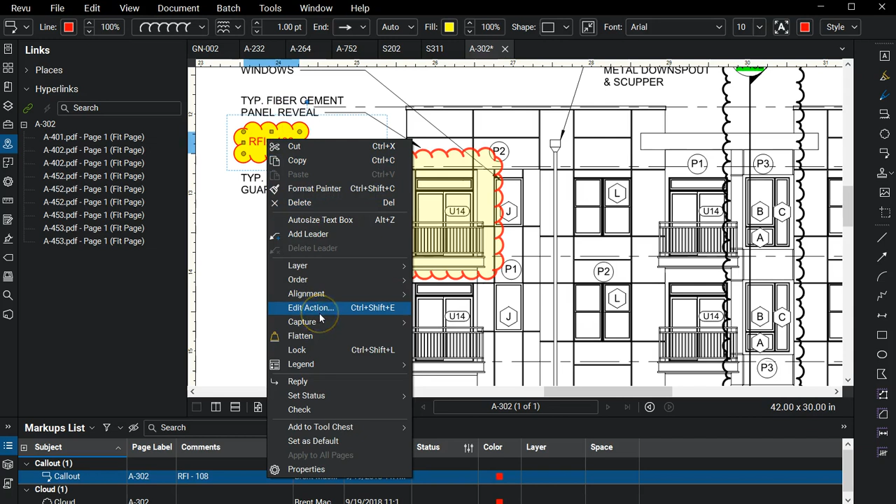I want it to open a specific drawing, so I can check open or RFI, and then I could go back out. I created an RFI folder. Here's RFI 108. It opened, and now when I click on that, it's going to take me to RFI 108. This little edit action detail is the one that actually will jump to it. But if I flatten or make the markup part of the drawing, you'll see here that the entire markup actually becomes the link itself. So if I just hover over that little square there, that little lightning bolt, that's the actual link I could use now.

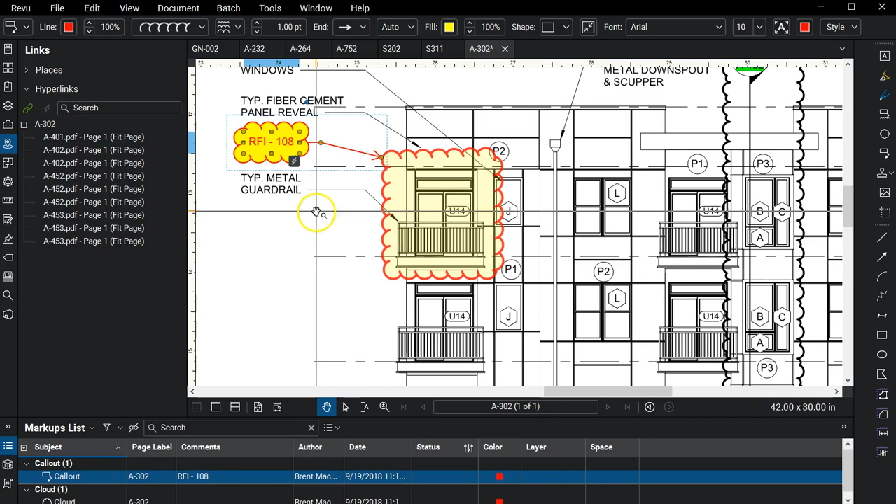But I also don't want somebody moving that later. So using the flatten tool, or under documents here under flatten, this will actually make it part of the document. So you can see I can no longer edit that. I can unflatten it and bring it back to an editable state, but this way I don't have to worry about somebody coming in here and moving that around. So in this case, when I click on it now, the entire call out is linked and it jumps me to RFI 108. So I can see what the question was and then what the actual response from the architect was for that particular RFI.

So again, it's a very useful thing to go back through and add this to your digital plans, because it makes the plans as up to date as possible. Having a plan set that doesn't have any RFIs associated with it is just the same as taking a set of hard copy prints in the superintendent's trailer on the job site and never updating them with the RFIs. That's just a no-no in the industry. Whenever you get an RFI, part of your process is to go in and update your drawings as soon as you get the RFI. Well, now you're doing that, but in a digital sense instead of a physical sense.

But the nice thing about this too is you don't have to just put RFI 108. You can put additional information in there, and you can move it around so it's not going to cover any other text in the drawing. You can type other small comments in there, even notes to yourself to make sure that you're going back and double checking something and getting the proper action that you're trying to get out of it.

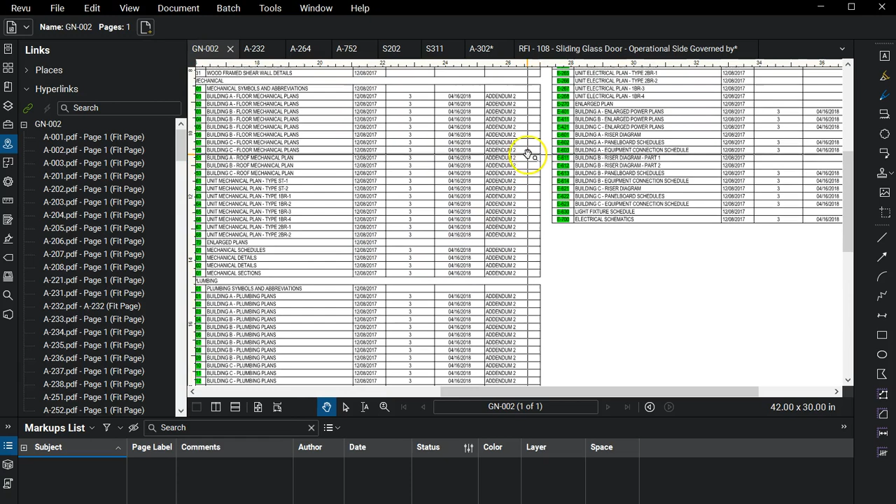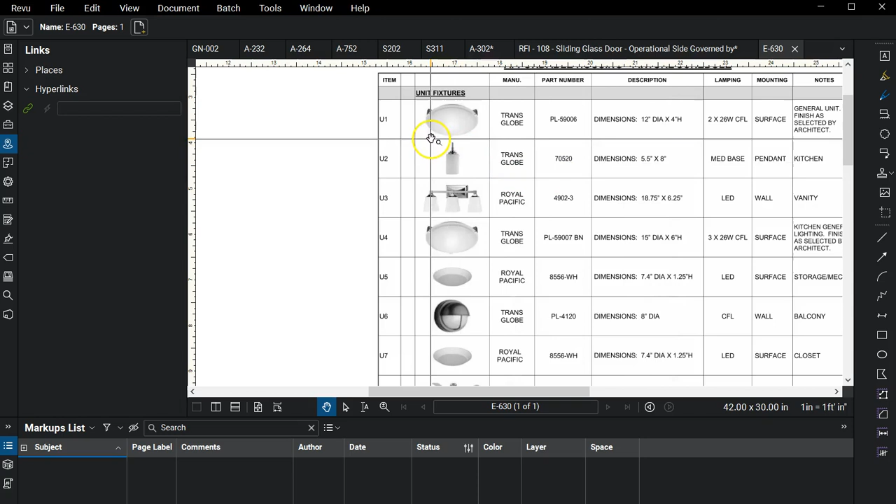Let's try and find it. Here's a light fixture schedule. So you could have gone through this fixture schedule and provided a hyperlink here in U1 that opens up page 42 in the lighting fixture submittal, and that's the U1 fixture. So you can actually individually link all of these light fixtures to their approved light fixture in the submittal.

So you can see ultimately what the comments were, whether or not the fixture is the approved one or not, because it's not uncommon for the light fixture schedule to show this fixture, but another one is actually approved in the submittal. So if you don't have that information readily available to you, you wouldn't expect a superintendent to walk around with a half-size set of prints and all of the submittals that were ever approved in the job. You can do that all digitally.

I mean, it can be anything from truss approval drawings that you can attach to the structural second floor plan, or the roof truss approval drawings that you attach to the structural roof plans, or it could be plumbing fixture submittals, it could be paint. So a finish schedule that has PT1, PT2, PT3, you can actually provide a link to each one of those colors to the actual approved color in the submittal. So you can actually see for yourself what that color would look like.

You have to be cautious, though, looking at something digitally for color versus physically in front of you. They might differ a little bit, but you at least get an idea of what the color should be. I mean, I could go on and on about all the things that you could add to your drawings. It's really limitless, the additional information that you can put in your drawings.

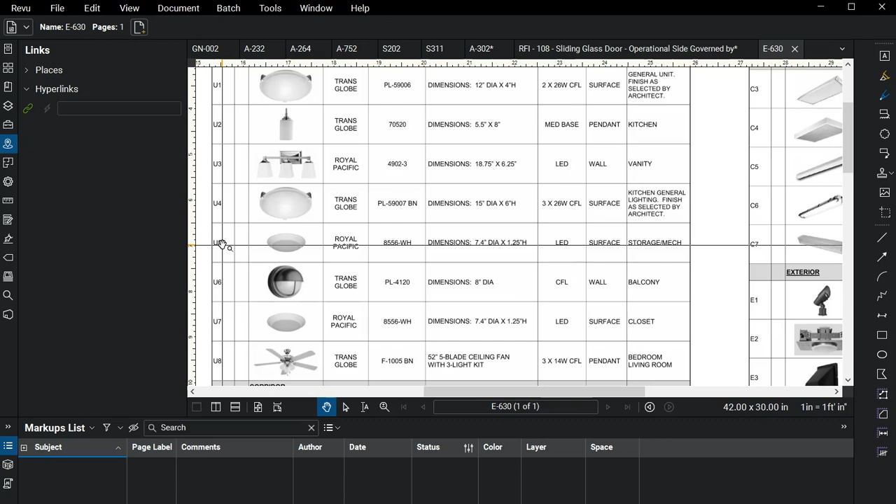So I again think it's almost limitless what information you can put on here, and being that it's digital, you're not necessarily enlarging the file size here as much as you are providing these links to other areas in your project folder structure. So this RFI, for instance, is not part of this drawing on A302. This RFI is not part of the drawing. Only the markup is, but the link itself is taking you to a completely different file.

So as long as your iPad or whatever device you're looking at these drawings and documents in allows you to navigate through your company's folder structure, this is something that, again, you can utilize, and it's basically transferable as long as the folder structures remain equivalent. So I can't, for instance, just copy over the extracted files to a flash drive and put them on another computer without copying that RFI folder as well in the same folder structure that RFI folder resided in.

So if it was a completely unique RFI folder outside of the drawing folder itself, I would have to copy that whole folder structure over, because essentially what you're doing with these hyperlinks, you're telling that hyperlink, go look in this folder for this particular file label and open that file. So if you, again, don't copy the folder over, that link in here will turn red. It'll say it's broken because it's not able to find that.

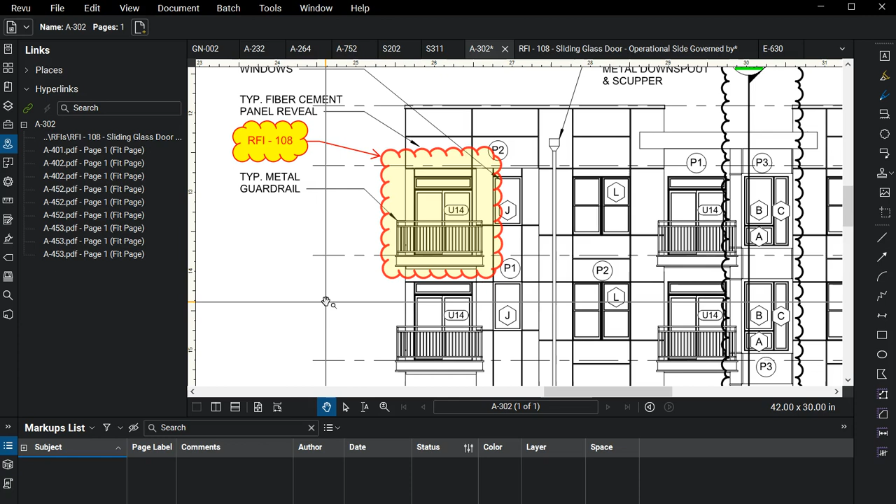You can also actually attach documents within this sheet. It does increase the file size slightly, but that's another way around that, and just another way to accomplish that goal. But you also don't even have to stop at these labels here. You could also go through and hyperlink the B-type window to the window schedule, and so when you click on this hexagonal B, it will jump you to the window schedule.

Wall types are another one that I like to do when you're looking, for instance, at a floor plan view. Let's just look at a floor plan here, just real quick.

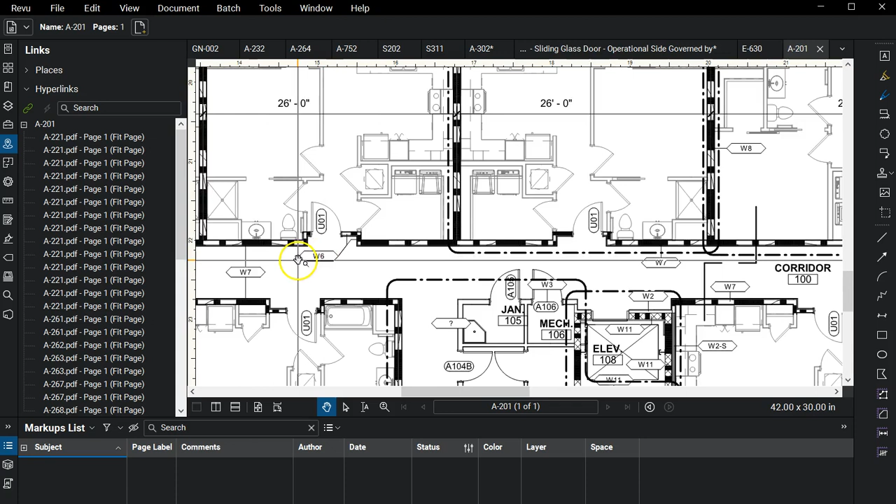So you might have different labels for different walls or doors. This W6 wall, I can put a hyperlink on a W6 wall here. I can search for W6 in all the drawings and then have it hyperlink back to that particular wall type.

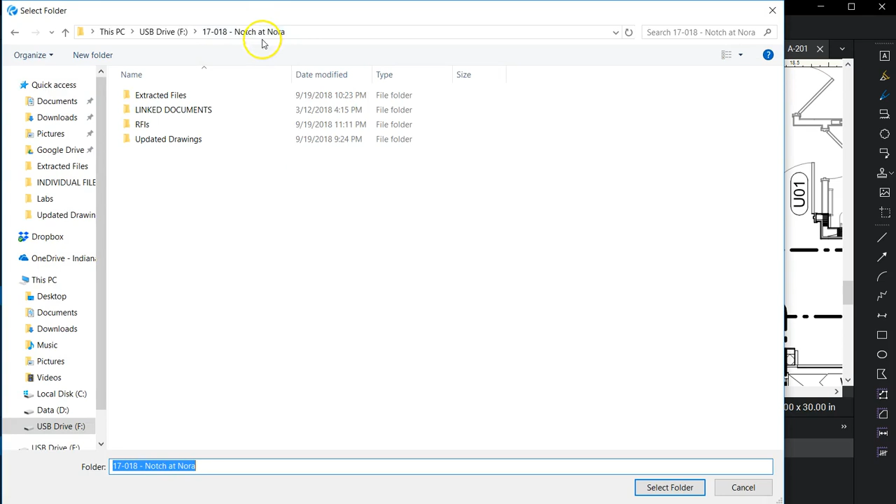And I can do that without too much trouble. I can go to this search bar over here, and I could just type in W6. And then I could tell it where to search. I can either search this whole page, or I can search a folder, which in this case I'd want to search the extracted files folder. So it's going to look for W6 in every single one of those files.

Hit search, and again, it'll take a little while to run through every single sheet, but you can see what's going on here. It's looking through every single sheet. It's starting with GN, and it's already finding some of these wall types. In this case, it found this particular wall type. Well, if I wanted to jump to actually W6, just like I did the other links, I would have to actually create a space around here and call it W6, which I can do.

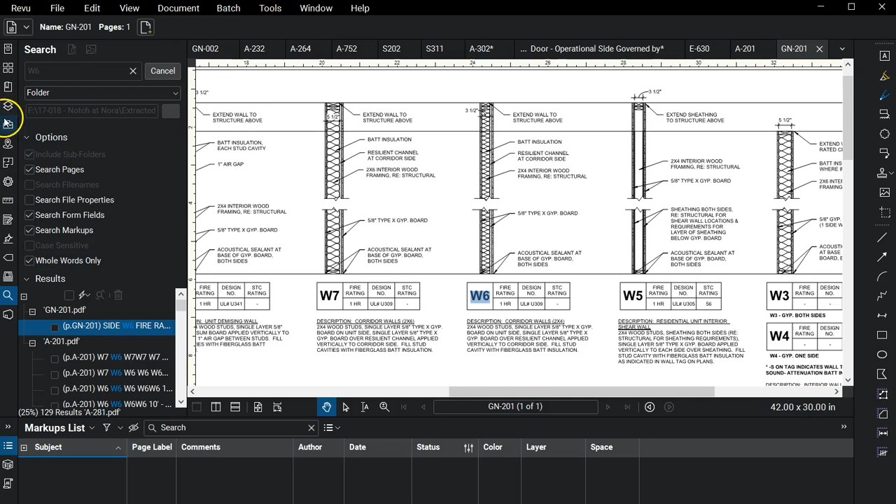Again, go into spaces, add a space, highlight over here, and just call it W6, and hit OK. Not sure if that canceled my search or not. Nope, search is still going on. But you can see, as I jump to these next ones here, it's finding all the instances of W6 on all these plans.

So once this is done, what I'm going to do here is I can actually highlight all those and tell it to jump me to sheet GN201 to that detail, the space W6. I'll pause it, and once it comes back, I'll show you how that's done. So here we are, it's completed. It said it found 142 results in 13 documents for W6. So I can just spot check every now and then, and sure enough, it's finding that same W6 that I want it to.

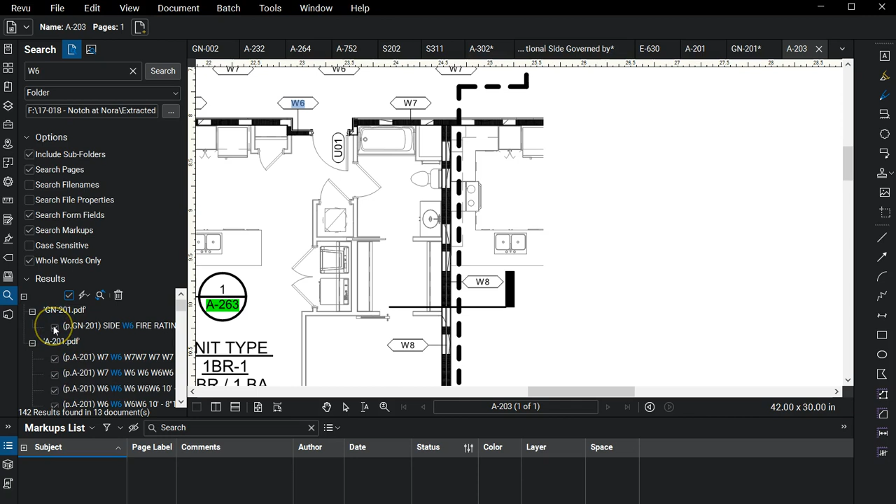So what I can do now is actually tell it to select all of those W6s except for this one on sheet GN201. I don't want it to provide a hyperlink there because it's going to be a circular reference. It's going to just take me right back to that same detail. It doesn't make any sense. So every other one of these is now highlighted or checked. And now I'm going to tell it what to do with that.

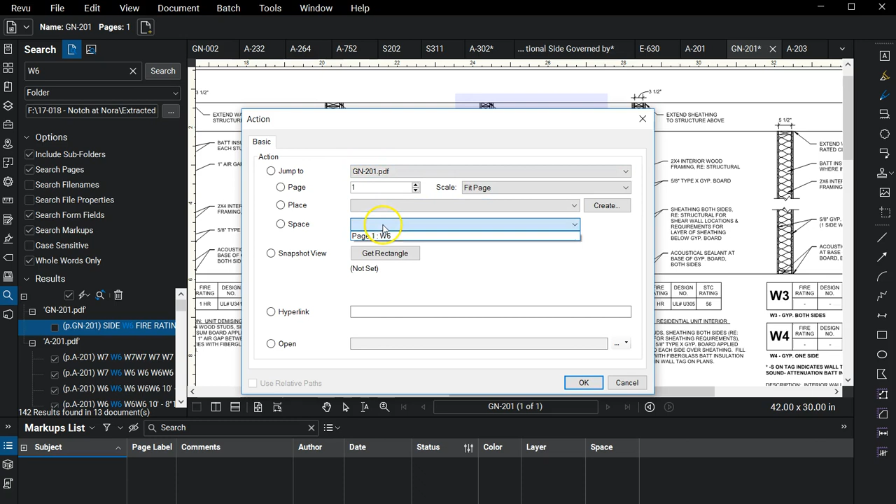So I'm going to tell it under check options to hyperlink checked. It's already going to jump to GN201, but again, I want it to jump to detail W6. Hit OK. And it's going to run through every single one of those sheets and add hyperlinks to the W6 wall that it found. All those W6 walls, 141 if you don't count the one it found on sheet GN201. So again, it's putting those links so that when I click on any one of those W6 walls, it should jump me directly to that detail.

So here we are, the W6. Let's see. Boom, jumps me right to W6. So again, the possibilities are limitless for you to make just about anything easier for anybody to find more information about, just by taking some time to understand the drawings and understand how it's going to link you to those drawings. That's going to be it for this tutorial.